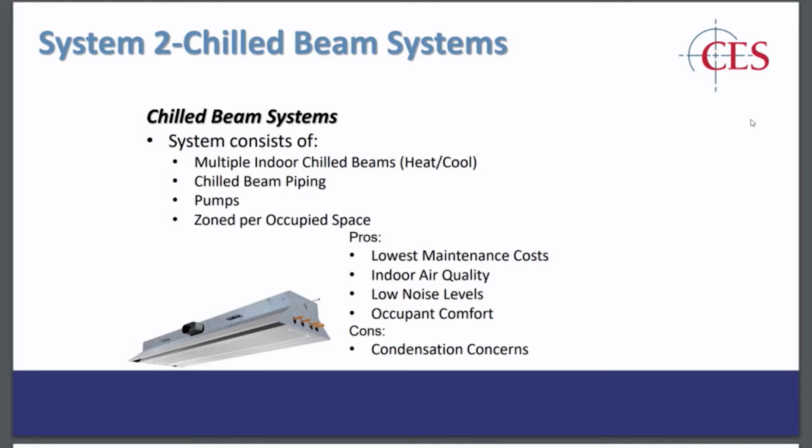So a bit of a technical description here, but this is the system we're pursuing, called the chilled beam system. It's the mechanical system for the classroom. What's great about this from a mechanical standpoint is it has pipes and water to it, no moving parts, so the long-term maintenance is fantastic from a facility standpoint. The other piece is that there are units on the roof that bring fresh air, constant volume fresh air, to all the classrooms. So the air exchange you have today is really just from operable windows, but with this you have a constant change of air exchange. It's all filtered, and there's a heat recovery wheel on the system, so it's very energy efficient. We think that was met with pretty good reaction across the board for PBC facilities as well as the energy task force.

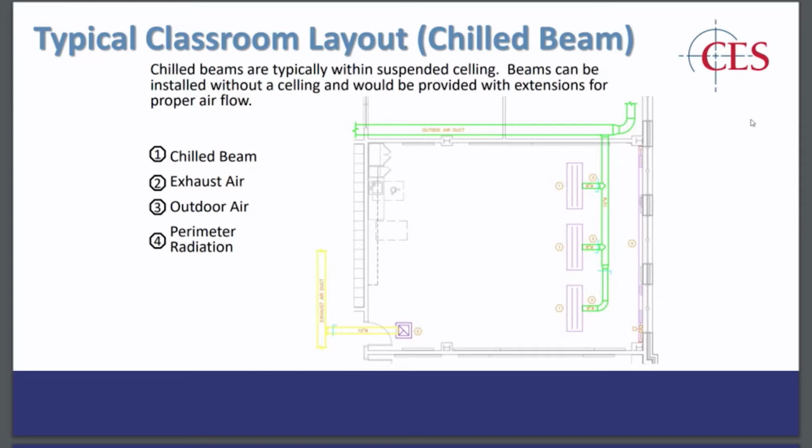So just a little bit of detail on how it would lay out from a planimetric view. On the right side, you're looking at a plan view. What we're really interested in is making sure we get air exchange, fresh air in, and then exhausting the air out of the room.

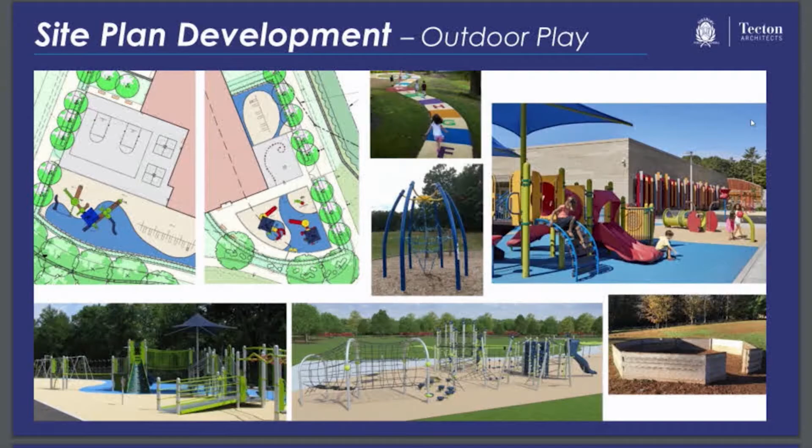Just to highlight, the existing parking and bus loop remain, as you mentioned. We are making some improvements to the entrance because it is a little bit confusing, so we're adding a median and some plantings to separate it, so you'll have a very clear distinction between bus and parent circulation when you enter the site. There's enough parking there - we're keeping it pretty much at where it's at today, and we're maintaining the overflow to the basketball courts for event parking. The current directive is we're going to see if we can get a little bit more overflow parking if there are more events, but we're keeping it basically right at where it's at today. We think that's appropriate for the daily use.

I mentioned the age-appropriate play areas, so there are 4 play areas. K-play, grades 1 to 3. There are 2 of them over on the left side of your plan here, 2 different kinds of play areas, and then up in the back, grades 4 to 6 as well.

So a lot of site development around the perimeter, as I mentioned, with outdoor learning around the perimeter. With the 2 additions, we create these outdoor protected courtyards, which we're then developing. The courtyard on the left, which I'm highlighting there, is adjacent to the music room, so we can have outdoor performances if we open up the music room to that space, which I think will be a really interesting piece.

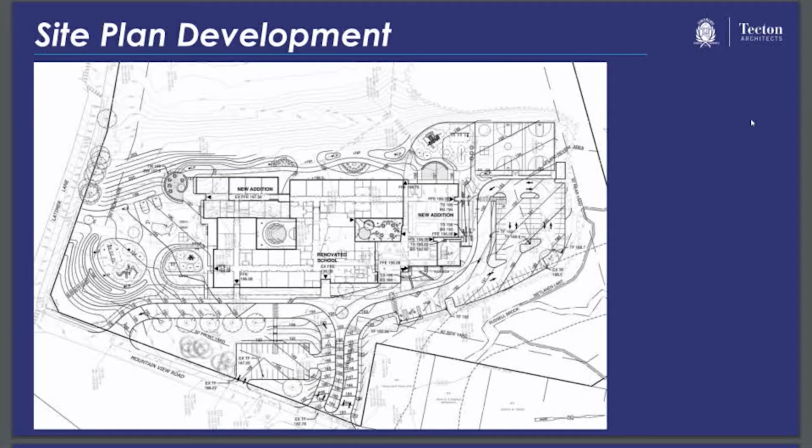So this plan is more of a technical plan about the site grading, that the committee wanted to see at the last meeting. And then here's the proposed floor plan, and I'll walk you through some of the diagrams that are following in the upcoming slides.

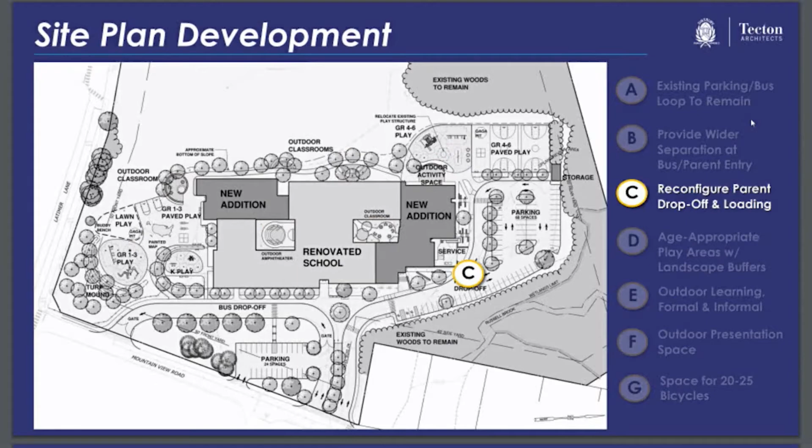Does that cause any issues on the parking, like what we see at Terrico, with that one side that's right up on the wall? No—if you don't mind, I'll flip back real quick to show you.

So you've got about 30 feet here, and believe it or not, there's about a 4-foot grade change from the existing door down to the current parking lot. All of these walks are designed at 1 in 20, so they're not ramps, but it gives full and complete accessibility to all aspects of the building.

So this basically slopes down a bit, like 4 feet. This buffer is another opportunity for waiting—it's about 30 feet, so it's a pretty big buffer. To answer your question more quickly, it's not going to be right up against it, and we think that buffer creates another opportunity for outdoor space where kids can sit on the hill and it can be taught as well.

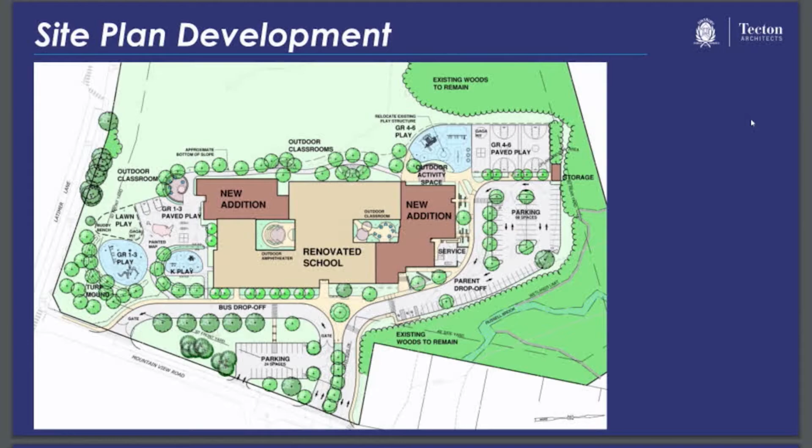Jeff, I'm going to hit you with one more question on the gym. Because what Brian's getting at is something he's been involved with in youth sports for a long time in town, and anybody who tries to schedule gym time in this town knows what a challenge it is. So if you don't know the answer, that's fine—what's the length of that court in feet, do you know?

A standard basketball court is like 94 feet long. If it's anything close to that, when you say it's a youth size or whatever, I just want to take a look that it's going to be space where either older 7th, 8th grade travel kids can play a game on it or not. That's just going to be an important thing to know one way or the other. Well, definitely—I don't know it off the top of my head, but I'll get it. That's what you're getting at, right?

Yeah, that's what I was getting at, because I looked at the diagram and I see the 3-point line runs into the out of bounds, and I'm thinking like Central School type size, or maybe a little bigger, which is better than anything we have right now. No, right, but it's important to know. I can tell you the gym itself, the box itself, is about 6,200 square feet, and in 6,200 square feet you can get a regulation size basketball court.

But we'll definitely overlay that—that's a piece. We're in schematic design right now, which is about whether we have the spaces where we want them and enough of the spaces. The next phase is to talk about what lines we want in the gym—basketball, volleyball—so we're moving into design development, which will give you all those details. But that's a great question.

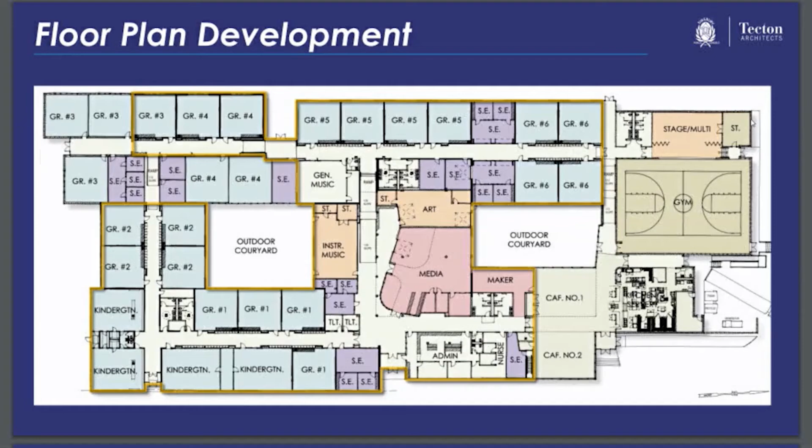Okay, so let me walk you through just some of the highlights of the plan.

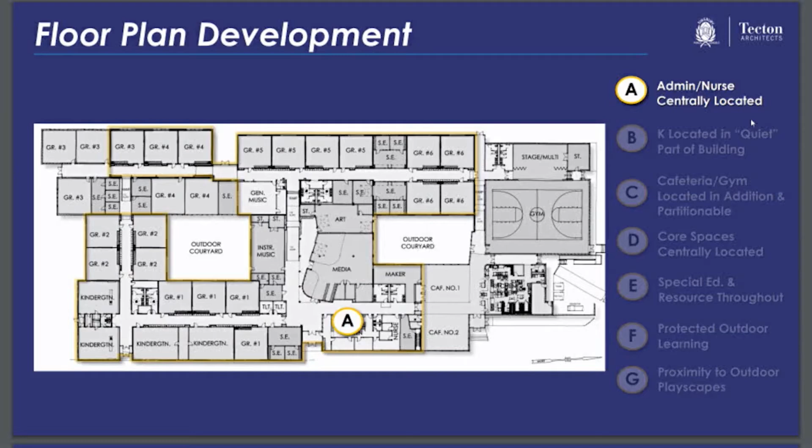The admin nurse area is completely reinvented but remains where it is. It has good visibility over the parking and entrance. You can get to the nurse's office from the hallway without having to walk far. There are proper exam, resting, and toilet facilities to support those functions. It's a bigger space now since we're getting so many more kids at Latimer. It extends further down than what exists today, so we're shuffling some program elements out of there to make room.

Kindergarten, after much debate, we kicked around the location, whether it should be in different portions of the building. We landed in the bottom left-hand corner for a variety of reasons. Where grade 1 is right here, we're building in flexibility, so if long-term, big picture, grade 6 does go to Henry James and pre-K gets geographically distributed, we want to be ready for that to occur in this building. We're planning it and putting in the infrastructure so that if and when that happens, it's a relatively easy modification. The two on the left exist today, which is pretty much where kindergarten is now.

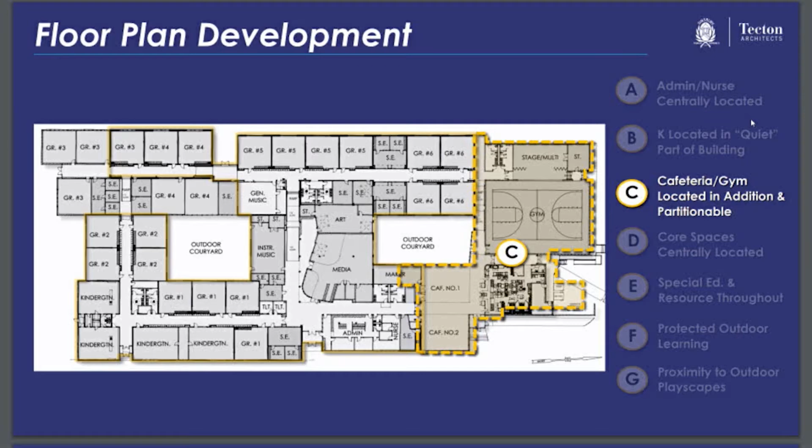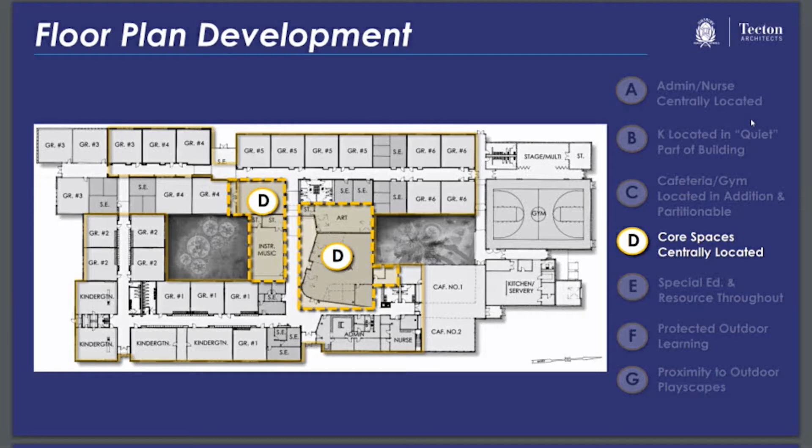The cafeteria and gym, as I already mentioned, are located so they can be partitioned away from the rest of the building. The core spaces, including the media center, art, instrumental music areas, relate to the outdoor protected play area, the media center, and the cafeteria. I think it sets up well to make sure those are usable spaces.

As I mentioned, the special education resource rooms are distributed evenly throughout the building. We talked about the protected outdoor learning areas, and a lot of thought has been given to the proximity of the outdoor playscapes. COVID has heightened the awareness and reacquaintance with outdoor learning and its positive impact on students, so we want to maintain that theme. You'll see those connections there.

Before you go, can you talk for a moment about that stairwell that was not handicap accessible and the grade change, and how you've addressed that issue? Sure. You're talking about up to the main hallway, outside the existing gym?

Okay, yeah, so we've done a lot of studying. If this is zero, this is plus 30 inches, basically stage height, and this is 19 inches lower than that. Those are all existing conditions. When we connect this, there's a ramp that connects it, so you have a full connection with complete accessibility around this loop of the building. On this side, what's interesting and a little hidden, you're up plus 30 again back here, which is existing. For the stage, we have an opening, and we've located what we call a stage, but it's actually a classroom with an operable partition that, when opened, becomes a stage because the gym is down 30 inches. We'll have exits and connections there, and then you come down a ramp that gets you back to zero. So each of these loops provides full and complete accessibility throughout the entire building.

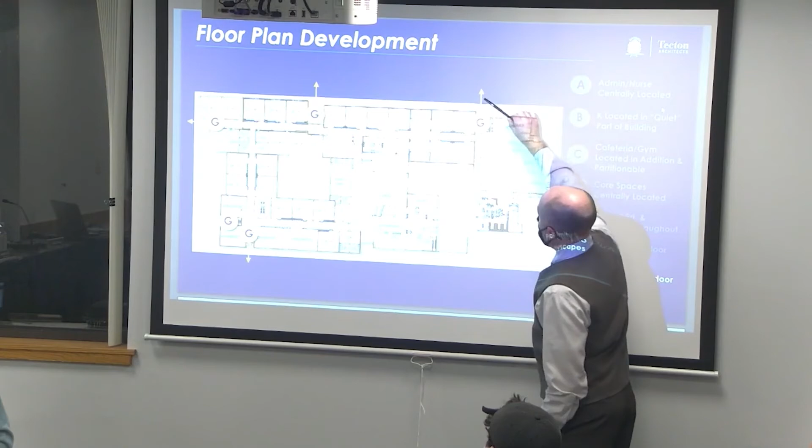Oh yes, I think it's an interesting feature. So with all these doors and various different elements, we're trying to build in flexibility. The other piece we're looking at is a backdrop to this area, like a garage door, so that if you want to set up a stage or performance with a mini makeshift amphitheater outside, that gives you another opportunity for outdoor presentation. We're trying to build in these pieces all around the building to give you options.

No, I don't. Jeff, can you speak for a minute though on the doors themselves? I'm assuming they're secure, but can you speak a little about the security of it? So we haven't gotten to the technical pieces of the hardware itself, but obviously we know you have various upgrades already, so we're going to match the same systems.

The benefit of having the connections directly to the play area is that it's easily accessible. The downside is you have to make sure they're adequately controlled. So what's not in here yet is a layering of compartmentalization of the building.

We started doing that with the site, because the school safety infrastructure guidelines talk about delay and deter. You want to buy as much time as you possibly can. So the next layer of this plan is going to start looking at those kinds of sequences to make sure we're covered. But all of the requirements as far as the glazing and the hardware, including bullet resistant materials and proper controls, will all be addressed in this piece of the renovation.

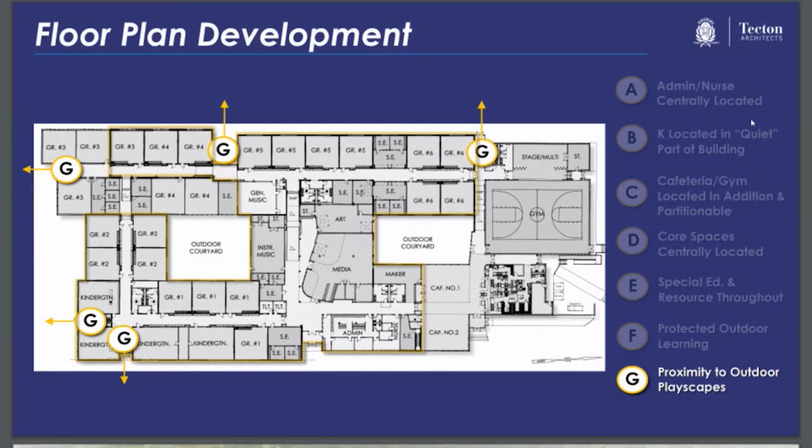Other questions on that? Okay, just an aerial view. I promise the next update will have new and improved renderings, because I think you might have seen this one. I'm not quite sure if you have.

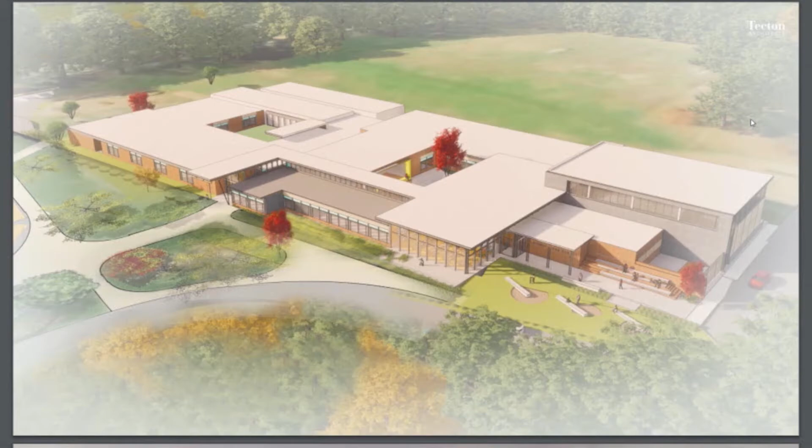So the gym, the cafeteria, the kitchen, the loading area. This doesn't necessarily represent the refinements we had, but what we want is nice glazing and an entrance here. This is the admin. We're talking about maybe looking at some entry piece to better recognize the main entry to the building. I think you've seen these before. Again, the gym on the right side, you can see this is about 25 feet with some clerestory lighting in there for natural daylighting. That's the caf, that's the kitchen, that's the loading.

Where are the bike racks? Bike racks are pretty much in this area... no, they're down here. Right where they are today, for the most part. Because I think that works pretty well.

20 to 25, is that enough for the population we have there? We go back and forth between 15 to 20, and when the weather's really nice, and at the height of COVID last year, we would have 25 to 30, but that's not typical. It's typically in that 15 to 20 range, but we want to accommodate for a little bit of an increase.

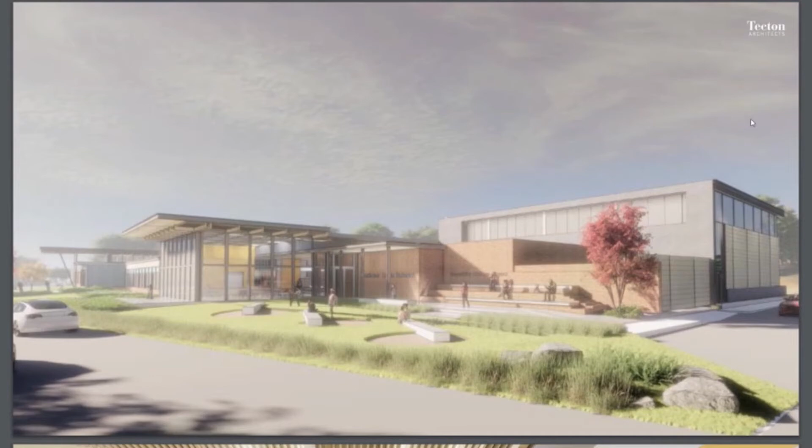That's the view of the cafeteria. So that's the protected play area there. That's down the admin hallway to the left. The media center is kind of on the right. You can see that yellow representing the media center wall on the other side of that courtyard.

And then so, next steps. Our next steps are, our estimator is currently working on an estimate to make sure we're on budget. We had a productive meeting today in our office with O&G to talk about the logistics and phasing of the building. That's probably one of the more difficult challenges, figuring out all the phasing to make sure we think through how systems are connected, safety, and sequencing. So we have to have those conversations early and often. In fact, I think we're having another one Thursday.

And then we need to start submitting for conservation, wetlands, design review board, and planning and zoning. So those are all through the next 3 months.

Really excited about the community conversations. We set one up on the 4th with the faculty and staff, 3:15 to 4:15, to give them an update, and then the Latimer Lane community on the 10th. That should be fun to present where we're at. In-person meetings, yes, that'd be great. Just want to let the community know it's an opportunity to come out and see the presentation. Yep, and that'll be at Latimer.